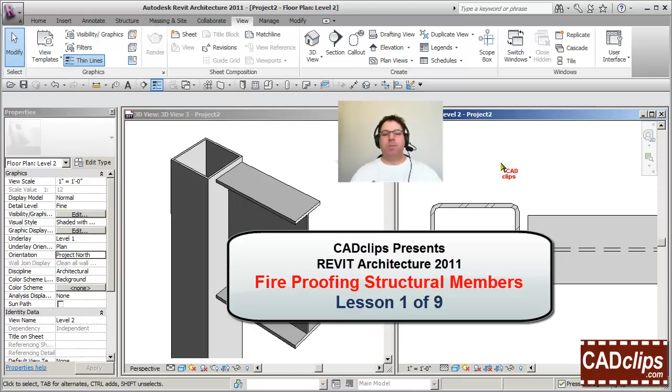In this particular video we're going to do a demonstration of the outcome of what we're going to teach you how to do here, which is to add a fireproofing coating to your columns and beams. So we're going to do a couple of quick lessons on editing some families, and once we finish, I've just got an example here of an HSS column and a beam coming in here, wide flange, which are modified versions of what comes out of the box.

All we do here is we have the option to click on a column and we can turn the visibility of the fireproofing on, and you can see it shows up in either view, and it also responds to the detail level, whether it's fine, medium, or coarse, which is part of the column properties.

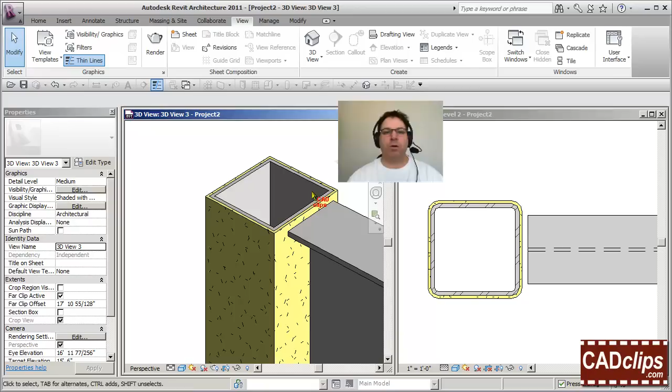I can do the same thing grabbing this beam, turn on the visibility of the fireproofing, and then I've got fireproofing. You can see the coating here. So this happens to be set to medium detail. If I switch it to coarse detail, you're going to see the difference. It's just going to follow whatever the column is going to do.

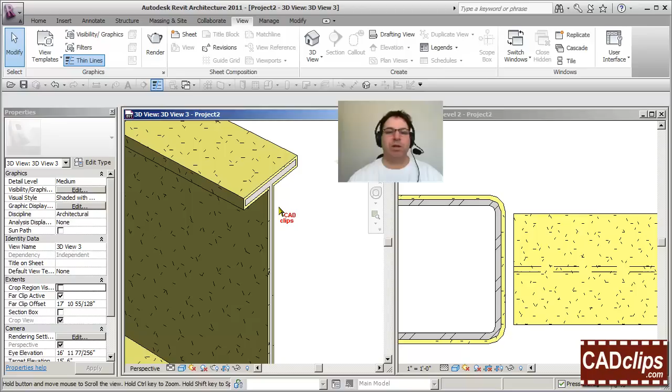Likewise over here you can see where the flange and the web meet. If we switch this to say fine detail, then we're going to get that.

Not any big cheers or hoo-haws for this particular video, but it is a great series where we can go in and modify these. I can even go in and change this to be a different type of section, and it'll update accordingly and also update the fire coating or the fireproofing.

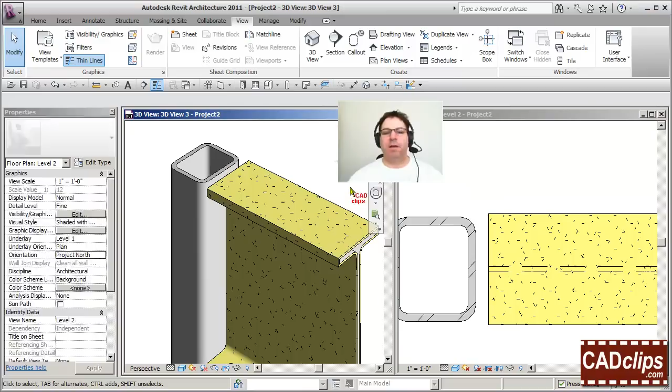At any point I can go in here as an instance property and turn off the visibility of the fireproofing. So I can change this to a different section here and it will update accordingly. I can change the detail level, it'll update accordingly, and I can pick on here and turn off the fireproofing. I can also change the thickness of the fireproofing by picking on here, going into here.

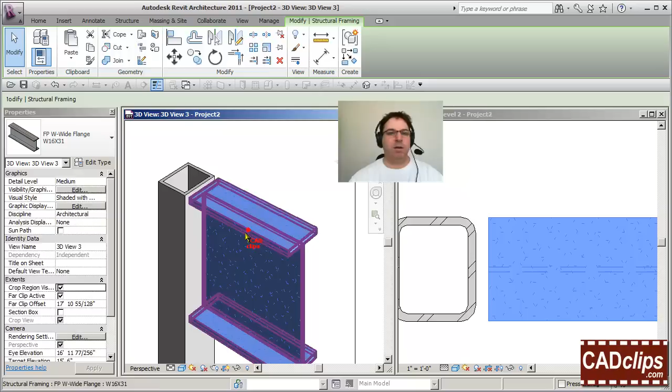Right now it's set to be 3/16 of an inch thick. So if I click on here and exaggerate this and make this 1/2 an inch thick of fireproofing, you'll see that fireproofing get beefed up over here.

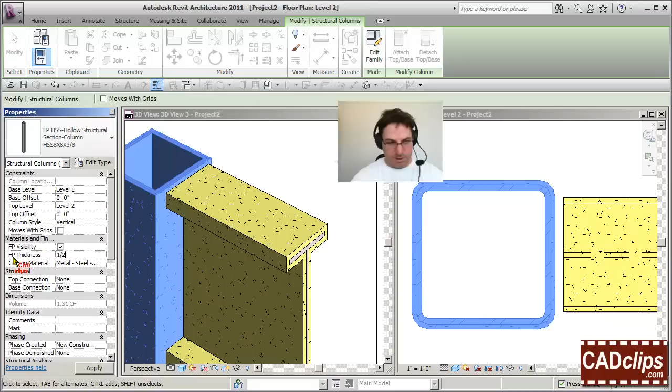Similarly with this column, I can say, okay, you are an 8x8 HSS, your fireproofing is turned on, and the thickness is 1/2 an inch. So a great lesson on showing you how to modify some existing families and add some fireproofing to your structural sections.